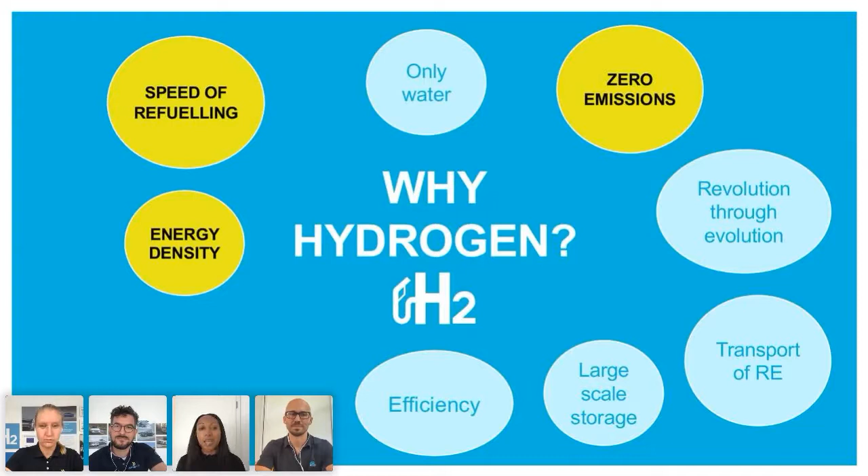First of all, let me say that I'm very happy to see especially so many participants from OEMs - I assume those are people who work for truck and car manufacturers. It's an eternal discussion whether the supply side or demand side should step up their game. In Germany, we've built, some people say, the highest number of stations per 1,000 vehicles, so we have pretty much a demand side challenge here. We've created a supply, now we need a lot of demand to continue with the supply buildup. Therefore, I'm happy that many OEMs are participating here.

So who is H2 Mobility? To put it in simple terms, we are a company based in Berlin. We have built over 50 stations on our own, and we operate today more than 90 stations, and we support others to do that. We are also a group of 45 passionate experts. We want to make a contribution to the energy transition, to making it a successful transition, and we believe that hydrogen is a key ingredient to solving the defossilization challenge we all face. Our role is to be a key enabler, to foster also the discussion and the distribution of knowledge. That's also why we are here in this webinar, to accelerate the widespread use of hydrogen in transport. We all believe in that as a clean fuel, and we want to play our role as an enabler. Therefore, we are talking today.

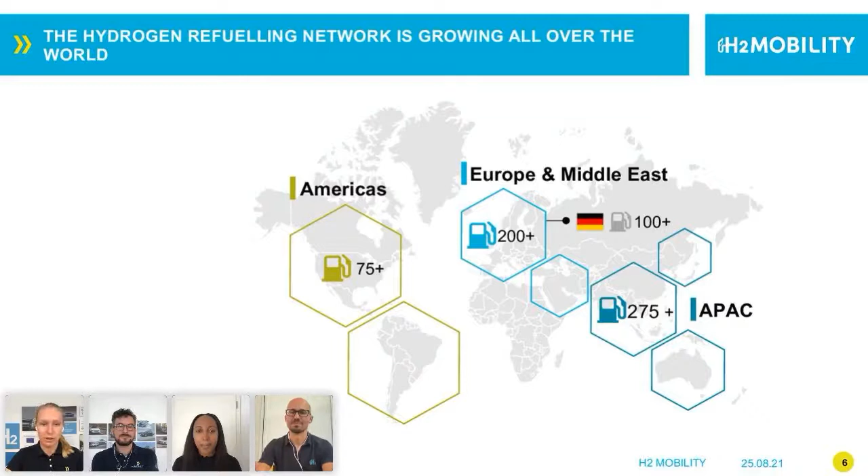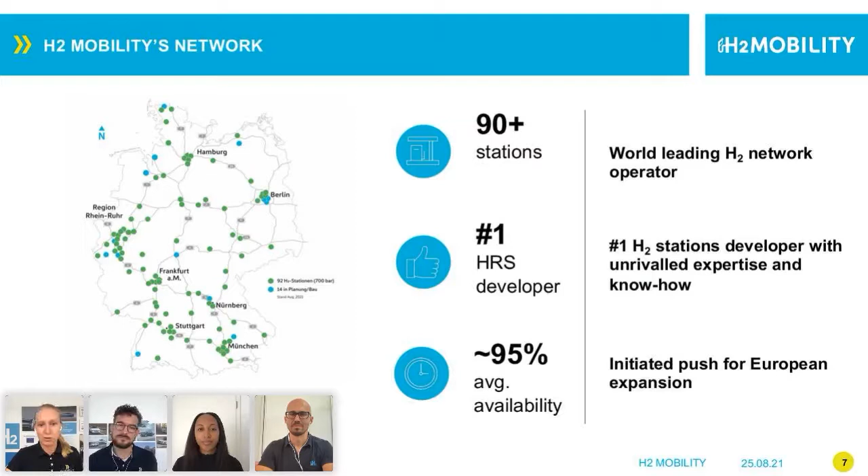Zooming into H2 Mobility's network, we have already said that we are the leading HRS developer worldwide, and nobody else has as many stations built and in operation as H2 Mobility. It's also really special because in Germany, the approach was to build an unconditional network first, and now we are really shifting towards more demand-based conditional ramp-up. One other figure we're really happy with is that we have an average availability of 95%, what is really important for our customers, that they get to the refueling station and it also works.

Looking at the different refueling stations that we have built, the idea until now and the focus was to look at cars, light-duty vehicles, and also buses, some medium-duty vehicles, with our S and M stations. Now, in the future, we are looking more at medium-duty and heavy-duty vehicles, where we will be building, due to customer demand, probably way bigger stations, up to 4 tons of hydrogen throughput per day. This is also what we analyzed now in our paper that we will be presenting.

So you covered a lot in that answer and that summary, but it sounds like there's a lot of change happening at the moment. You mentioned an unconditional ramp up to a conditional ramp up. You also mentioned the different sizes of HRS. So I guess the question is, why is this important now with all of these changes happening in the market? And what is the hydrogen demand projection and outlook of the market?

Yes, sure. We really see an intense demand increase over the next decade. Until 2030, we see that there will be a demand of 300,000 tons. This is mainly shifting from cars, passenger vehicles, towards the demand driver being heavy-duty vehicles. So by 2030, over 80% of the demand in Germany alone will be coming from heavy-duty vehicles.

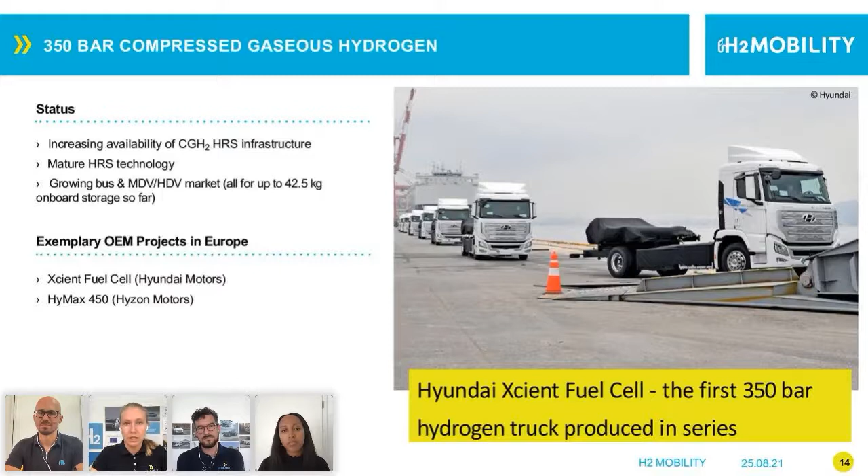Mm-hmm, mm-hmm. Yeah, thank you, Nora. It seems like all technologies have huge benefits, and then, like you mentioned, some challenges and trade-offs.

So thinking about the next hydrogen technology, 700 bar technology, I've heard that multiple OEMs are developing with this technology at the moment. So maybe, Lorenz, you could tell us about the second technology option that is described in your team's overview. And again, what is the current status of 700 bar technology, and specifically which OEMs are developing it?

So for me now it's a little bit easier because I can simply say it's basically what Nora already explained for 350 bar, but of course it's double the pressure. So there are quite a few challenges that come along with it that you don't have with 350 bar. As you can see, there are 2 OEMs working on it, Nikola and Toyota, for example.

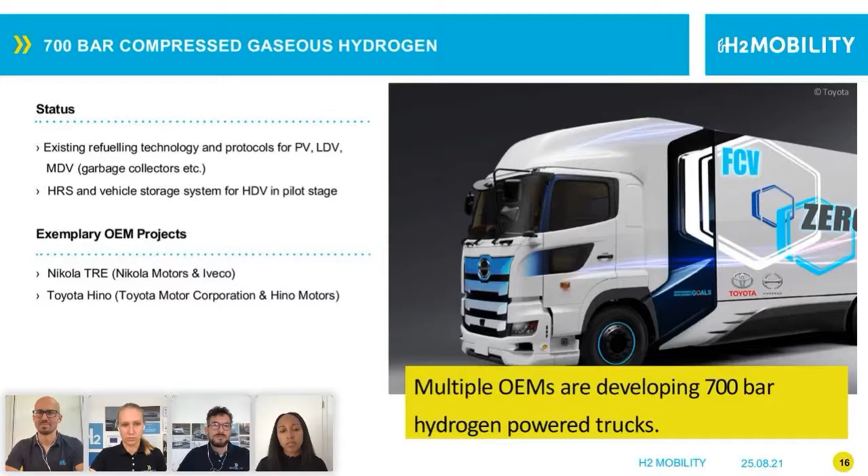So for both of the two technologies that Nora and yourself have detailed so far, lots still to discuss, lots open on the table, but it's clear that there are potential advantages and potential challenges to each.

Turning to the third technology, there's been an announcement from Daimler that they'd like to start customer testing with SLH2 with the GenH2 truck by 2023. So what's new with this third technology option? Maybe Nora, back to you.

Sure. So Daimler and Linde are really focusing on subcooled liquid hydrogen at the moment, which has the advantage of having a higher volumetric energy density compared to gaseous hydrogen. It is an advancement of the LH2 technology that has been developed before, and it would allow higher onboard capacities and high flow refueling for long range, for example, logistic applications.

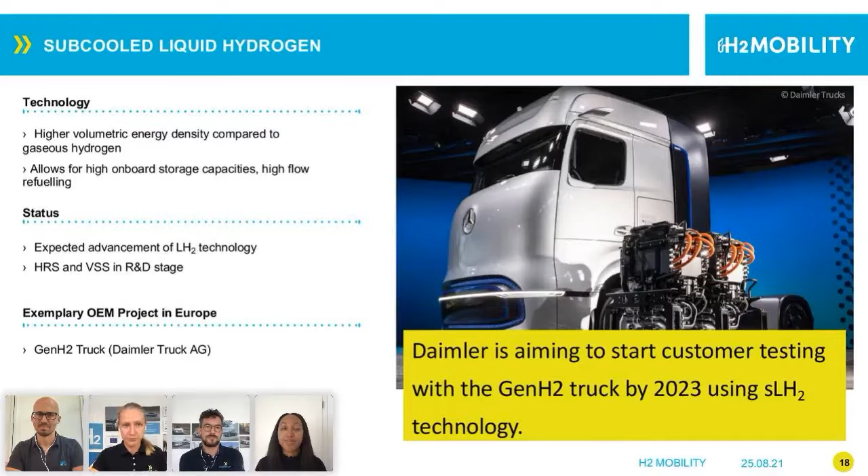All right, let's go back to Lorenz to talk about the last technology. So cryocompressed hydrogen technology aims to combine the best of both worlds. What does this mean, Lorenz?

I can say it's similar to what Nora said, but not. In the end, it is using liquefied hydrogen, but also putting it under pressure. So from a physical point of view, this means you can have the highest energy density to use. And of course this brings some advantages with it. The experts tell us that you need no data communication between vehicle and HRS, and you have a lighter tank system compared to subcooled.

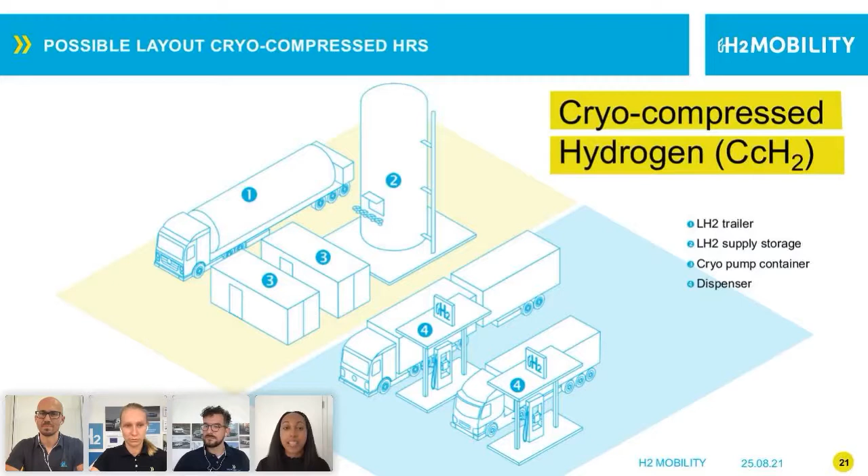Yeah, sure. Of course we were interested in assessing the different technologies, and therefore we looked at it in four different dimensions. We looked at the supply chain readiness of liquid versus gaseous hydrogen supply, the vehicle storage system readiness, which is also like the tank readiness, the infrastructure side, the HRS readiness, and also the maturity of standards.

I will not go into every detail right now, but overall we can say that 350 bar and 700 bar are closer to commercialization than CcH2 and SLH2, which are more in the idea research and prototype stage still. But the details you can read also in the overview.

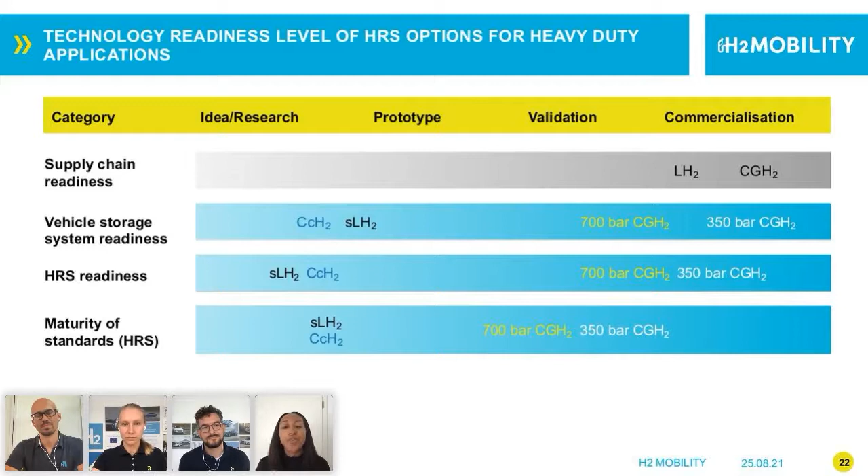So in general, Lorenz, what could you tell us about the main results that you've been able to derive from this overview? Yeah, for us as an infrastructure provider, we can point out that all solutions that we examined are feasible. So that's full stop.

We can do it. And this overview should give everybody who reads it a comprehensive and pragmatic view on what is out there. But at the moment, we try to show what are the trade-offs, what are the advantages and disadvantages. And by this, hoping that this can be a starting point for discussion, not only for us internally, but for everybody who's involved.

And so that we gain the speed that we need to be fast in deciding which way to go and where to invest and which infrastructure we want to invest in and build up, so that sooner than later we have those trucks on the road and they can be refueled on our stations.

Definitely. Yeah, now is a time for decisions. So then, Lorenz, what do you think the next steps will be that are needed for a fast, efficient rollout of the hydrogen refueling network? How can we come to these decisions that are so needed?

Well, we have seen it with the network for the passenger cars. It all works if everybody works together, and we are a little bit repeating history now, just on a different market segment. So what helped us to be successful was that everybody was walking in the same direction and working together.

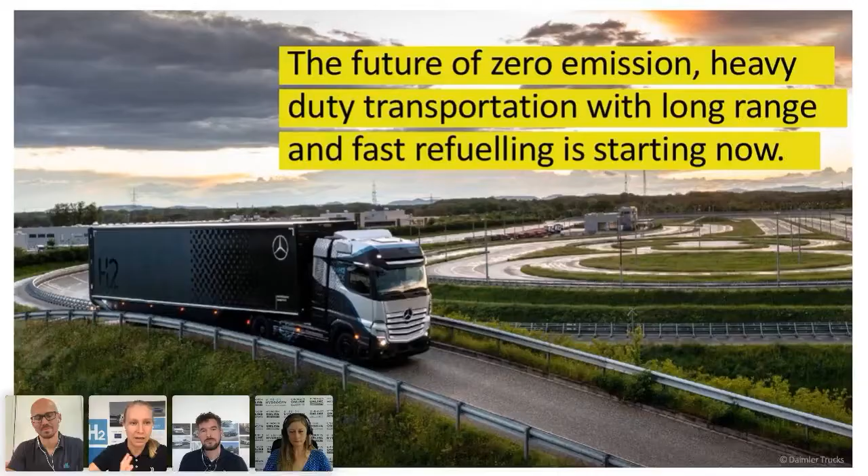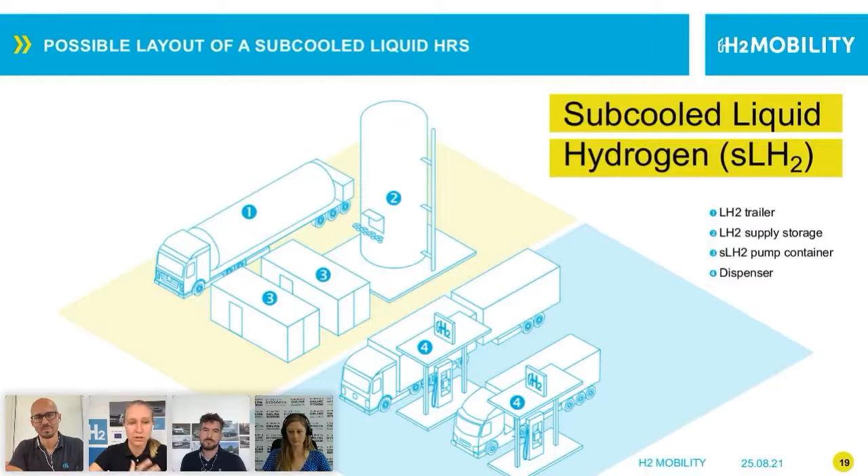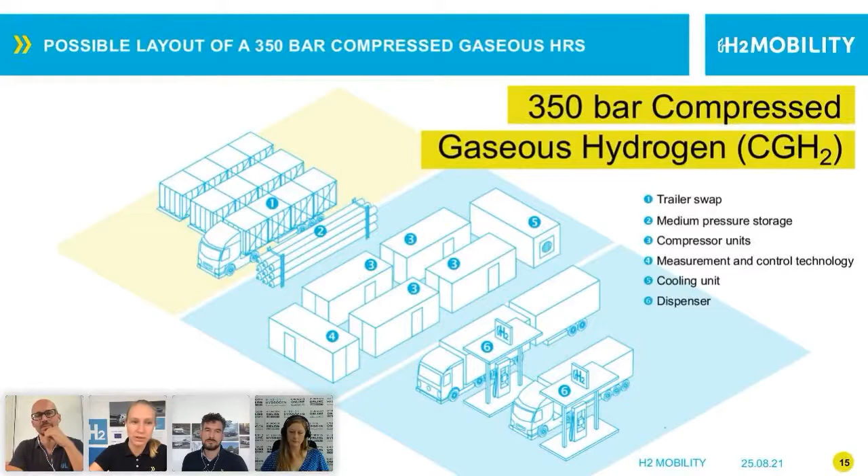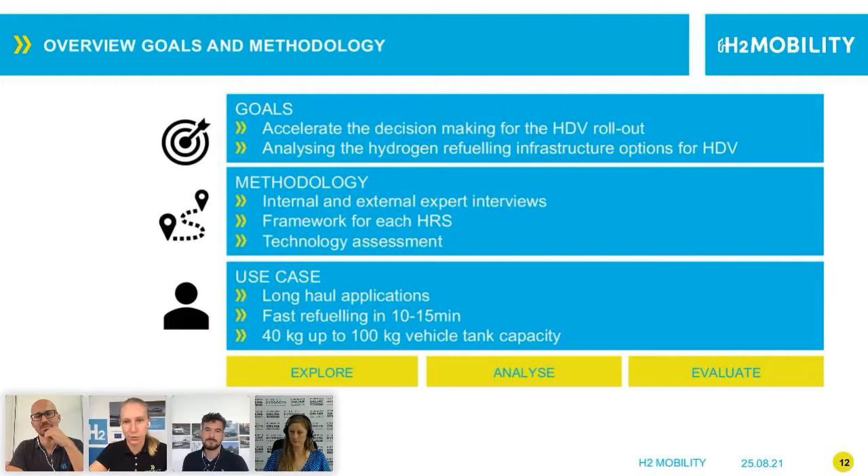Sure. On slide 8, we've shown the categories that have been defined by us until now - from S, M, L, and XL, double XL stations. But of course, it needs to be said this is an ideal world, and we are going to be building stations based on customer demand. So if there are more vehicles that need to be refueled, we can adjust that, but these are the general sizes we will be looking at. We actually had a lot of discussion about whether to call it XL or double XL, but in the structure of looking at the maximum hydrogen throughput - from L being 1 ton and then going to 4 tons - we would call it double XL right now.

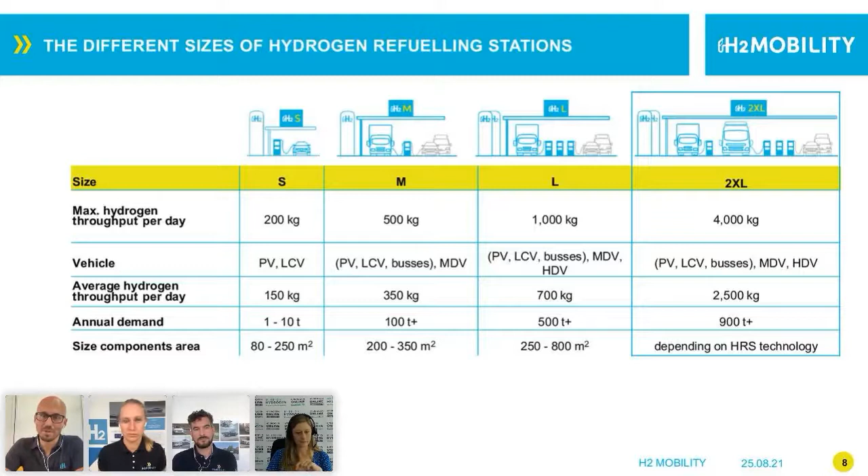Exactly, and I think the second part of the question was which technology. There is no particular technology behind L and double XL. M, of course, is 700 bar combined with 350 bar - 2 nozzles, 2 pressure levels. L, and you could add XL here as well if you want, are not defined yet - there are no stations in Europe, at least, of this size. We have defined double XL because we think this is the end game solution for really big quantities. Whether this is a gaseous station connected to a pipeline, or a station with liquid trailer swap supply plus liquid at the nozzle, or 700 or 350 bar at the nozzle, is not defined yet. It's more a functional approach to make clear what we are talking about when we show the station layouts in the further parts of the overview.

Going back to Jürgen Meereis: how many of the filling stations of H2M in Germany are suitable for heavy-duty vehicles requiring 350 bar, and how many are just suitable for passenger cars at 700 bar?